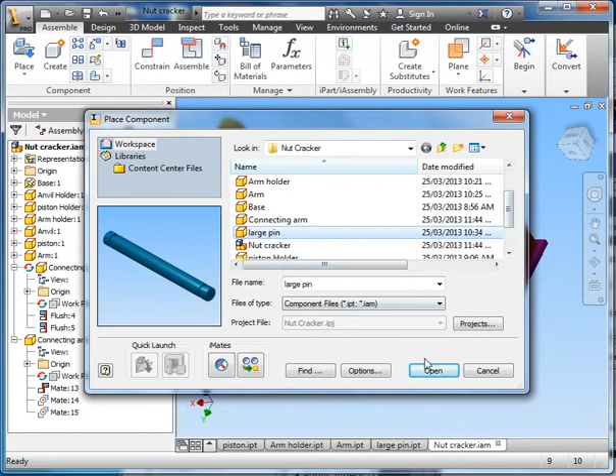Okay, next step, let's add those pins that we drew up earlier that go in these holes and there. So that's the small pin and the large pin. So place them. There's our large pin. Yeah, we only need one of those, and we'll place again. Find the small pin. Open, and yes, I'm going to need two of those.

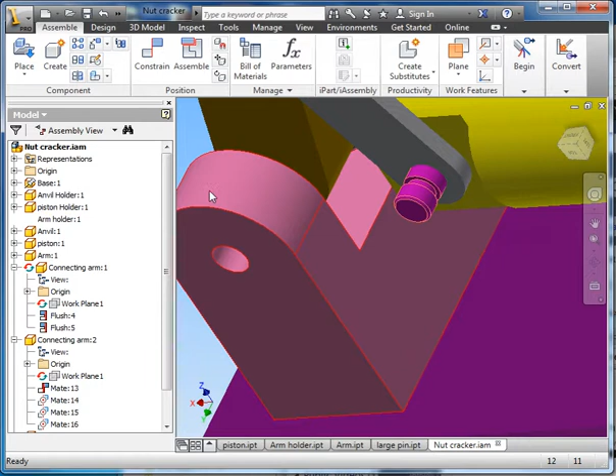We'll go to constraints. We don't need all this. And we're going to constrain that pin into there and apply. So as we cancel, you can see there's our pin nice and in there. And where's our other one? So we'll constrain that pin into the top hole and apply. You can see, there we go.

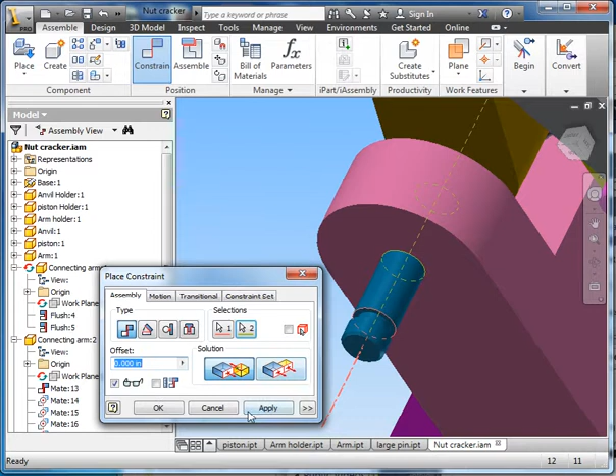And we'll constrain the large pin into there and apply, cancel. So there's our large pin in place. So let's rotate around to see what we have here. Now the large pin, it looks good, but these small pins, they look like they're about 1/4 inch too long.

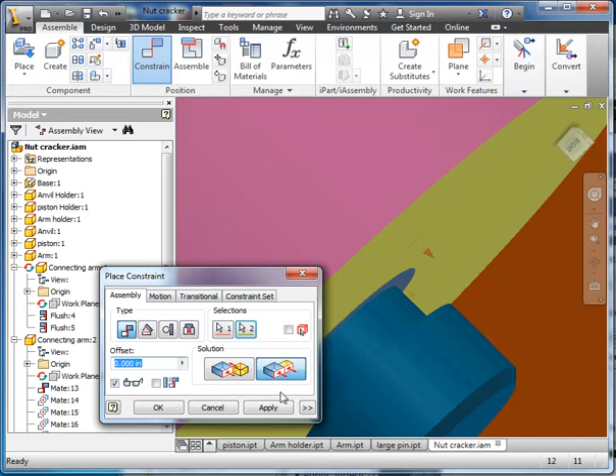So let's finish the constraints on this large pin. Let's go constrain, and we'll mate that surface to that surface, apply. So that pin's locked in place. But these pins, we're going to have to edit them. Now, I don't have that pin open anymore, so I can right click. Oh, maybe I can't.

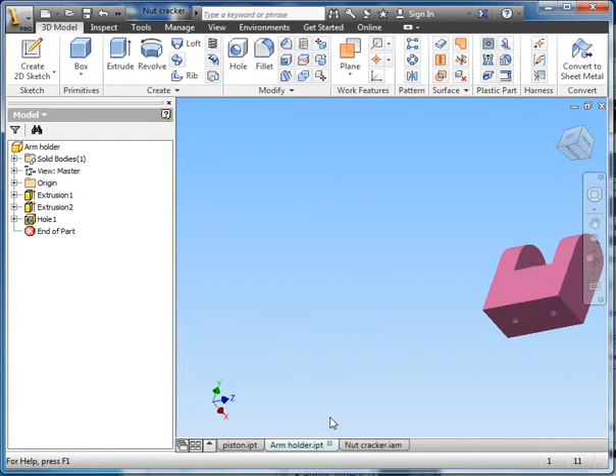Let's close that. Close that. Close that. Close that. Let's minimize this, see if there's anything else open. Nope, that's good. Now we should be able to right click, edit. There we go. Oh, that's the wrong part. I see. So return. Now it's selected, right click, edit. And you can see over here it's come up. So we'll click the plus and edit our first sketch there.

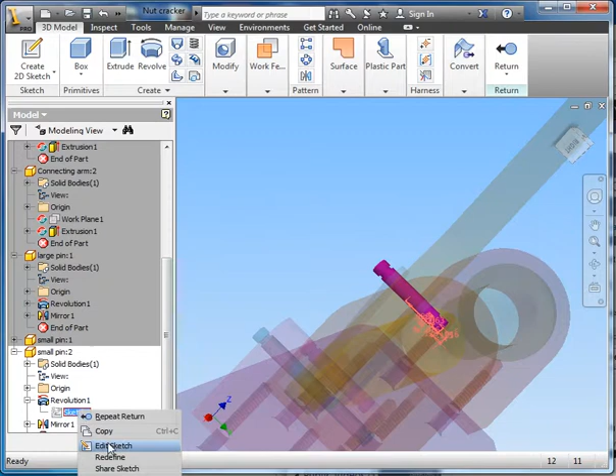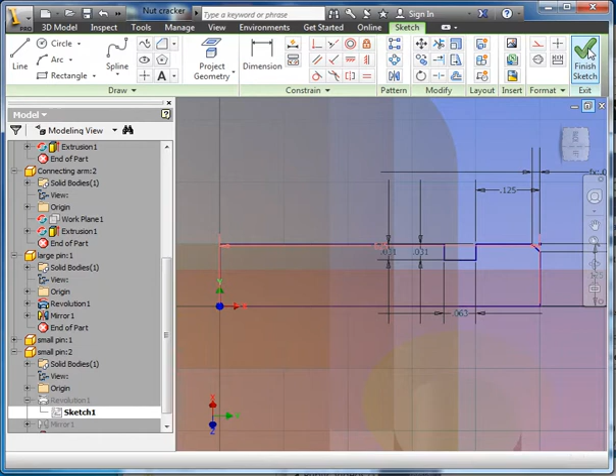Our overall length is a bit long, so we can click here. And we've got it set at 11/16 right now. So let's make this 5/8 instead. Let's see what it looks like. 5/8. And it looks a little better. Finish sketch. Return. And let's just go update. Where's our update? No update. So that still, to me, looks a little big.

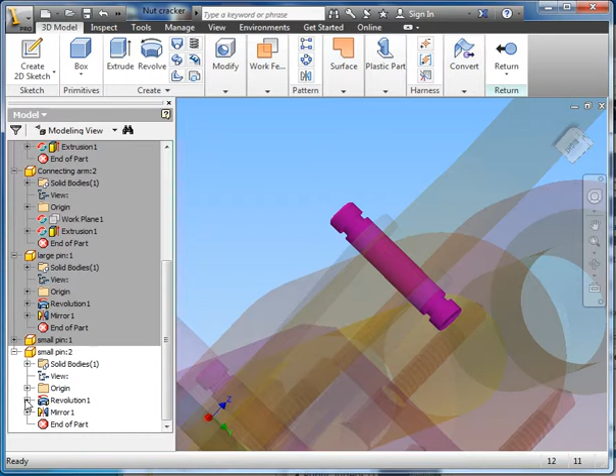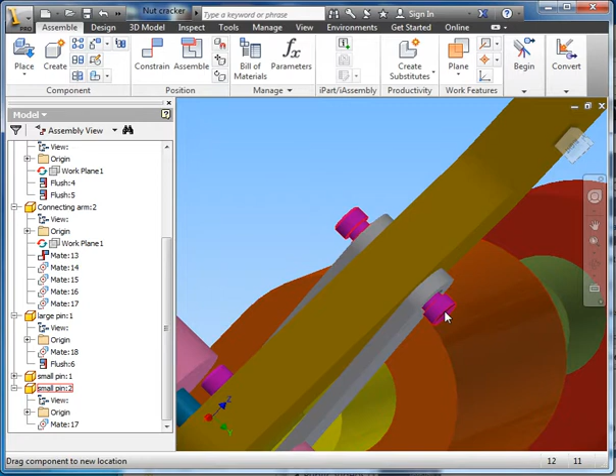So let's go back, edit again. Edit sketch. And let's bump this down again to 9/16. So 9/16. Finish sketch. And return. And that looks right. So let's go constraint. And we'll constrain that to that. Apply. And we can see, there we go, we're flush on both sides.

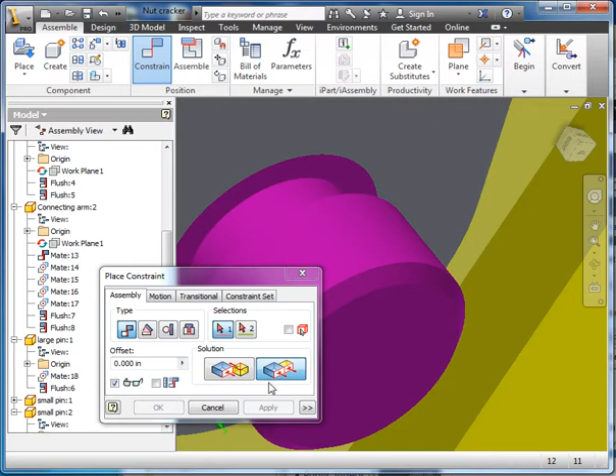And we'll come down to the bottom one, which should have matched the same thing. And again, constrain that to that. And apply. So you can edit these parts in place to get them to work. And again, we can see, a little slow, but there we go, it's working.

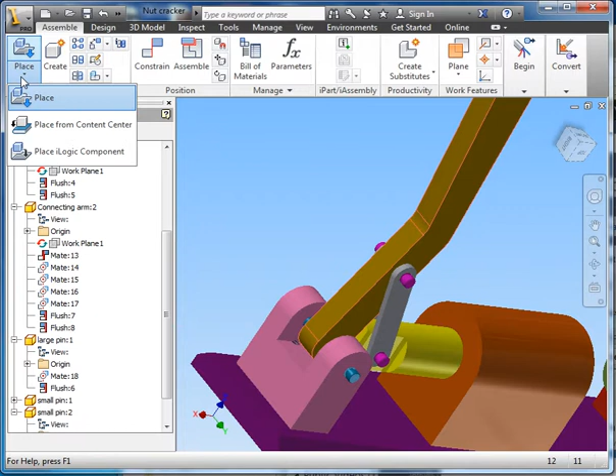Okay, so let's take a look at the content center, because there's 3 parts that we need to add on to here. So instead of going place normally, we can go place from content center. Just takes a second to load up. And that loads in here. Now normally when you first get here, this is what you're looking at. Now we're going to be working with shaft parts, and you can see down here shaft parts. I click the plus and it gives me a list of different shaft parts.

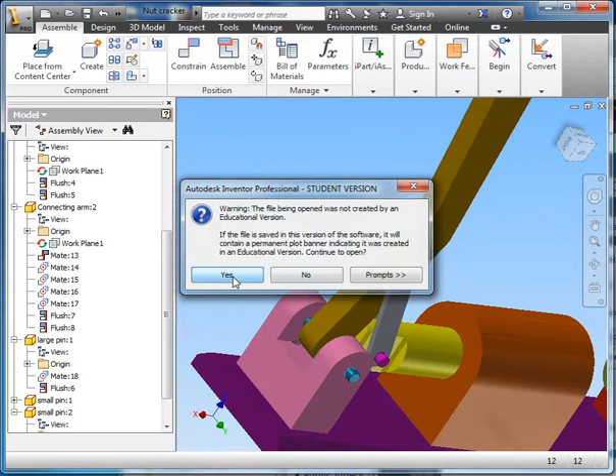We're going to use a circlip. We're using an external circlip. And let's see. Now these might not all work, but let's do external retaining rings. Okay. Click on that, and that's going to open up this part. And you can see there it is. Now if it doesn't fit, there we go. We can click on here. We want to click on there. There we go. Right click and apply. And we should have had a ring go in there. Let's try that again.

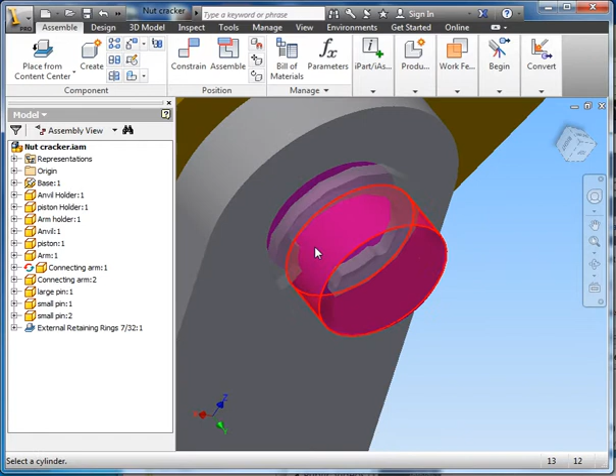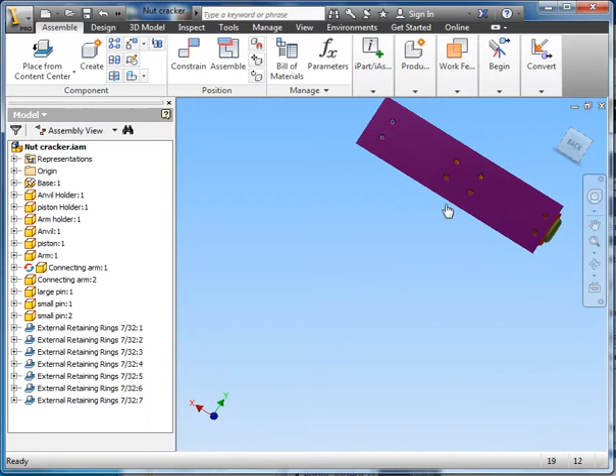Click. There, and you can see there's the ring. Yeah. So go around and for all these pins do the same thing. And you can see there I go, I've placed all the little clips in place. Good. So the last part that we're going to add from the content center is going to be these bolts for the bottom. So again, place from content center. And we're done with the shaft part, so we can just minimize that.

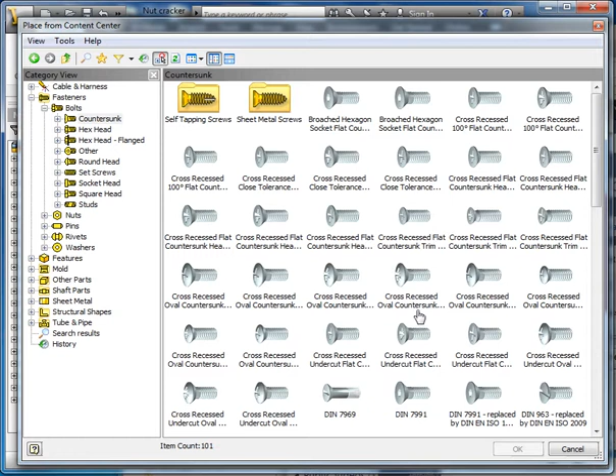And we're going to be using fasteners this time, so we've got it there, fasteners, bolts, and we've got different choices. We're going to use a countersunk bolt. It's going to give us lots of different choices here on countersunk bolts. Being we're Canadian, let's go down and find something good in Canadian. Square recessed, there's a Robertson there.

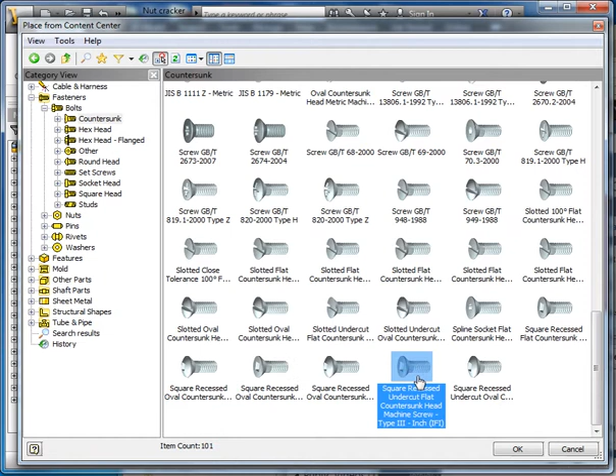And just make sure that you're using inch, because one of these is going to be metric. So there's type 3 inch, and this one is, oh, okay, they're both inch. Oh, there's the metric one. So, okay, inch, and okay. Warning file being used, yep, that's fine. So there's our bolt. We zoom in on the hole. Click on that, like so. And then right click, apply.

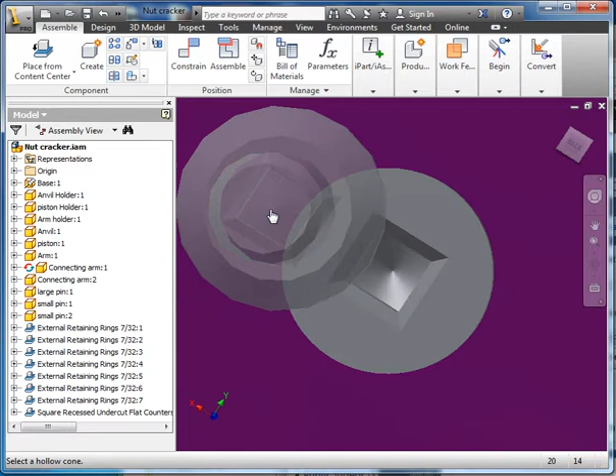Now it wants to know our size. So we're using, it's set at 0.37, we'll just bump that up a bit bigger. And okay. There's our bolt. So now I can go back to content center, but right now let's just hit the escape key. And you can see that this isn't necessarily constrained in properly. It's like it's going in, but it's not all the way.

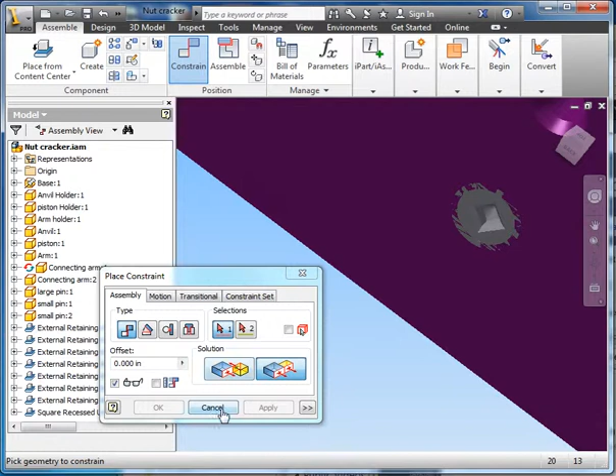So we can go constraint, flush, and just flush the top with the bottom of that, and apply. And you can see there's our screw in. Now, I've obviously made a bit of a mistake on the bottom there, but we'll go back and fix that in a second. So, let's hit cancel. I want you to go back and place the rest of the screws in place.